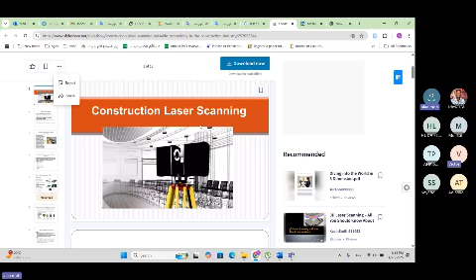In this research, we will define what construction laser scanning is and its applications in civil engineering and other fields, the types of laser scanning, the equipment and software used to generate models, the workflow for fieldwork and laser scanning, the challenges and limitations of construction laser scanning, and future developments in construction laser scanning.

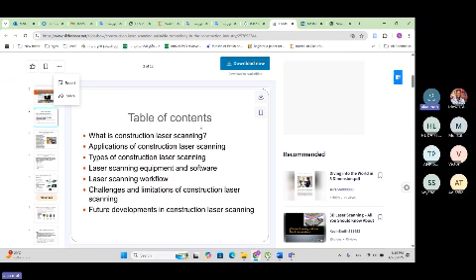What is construction laser scanning? We can name it as LiDAR. It's a modern technology used to create a 3D model from a physical object or environment.

In the field of construction, we use laser scanning to capture the exact dimensions, shapes, and position of buildings, street infrastructure, etc., with high accuracy and speed. In construction engineering, we name this 3D model as an as-built model. We can capture exact details of any structure or infrastructure or street, etc.

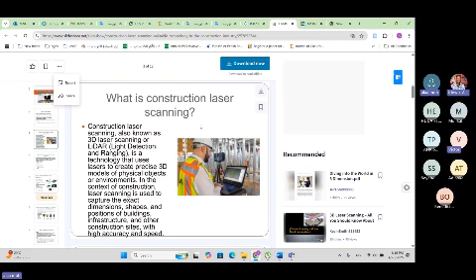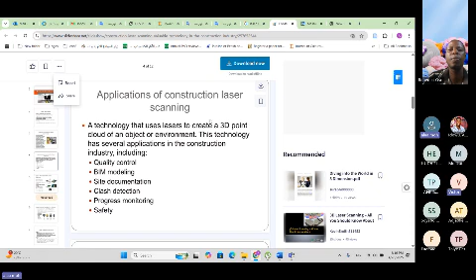Application of construction laser scanning in civil engineering: this technology is used to generate a 3D point cloud, which is millions of points for the object or environment. We have several applications in the construction industry: generating as-built models, quality control, BIM modeling, site documentation, clash detection, progress monitoring, safety and stability analysis, etc.

What are the types of construction laser scanning? We have 4 to 5 types of construction laser scanning: TLS, MLS (mobile laser scanning), aerial laser scanning, handheld laser scanning, and underground laser scanning.

Also, for aerial laser scanning, you can use a drone for this type of scan. We can put the laser scanner on the drone, scanning the details, let's say, above the building or any type of structure.

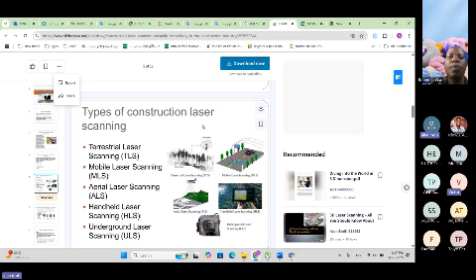We have many types of laser scanning equipment and software and many models. When we choose the best laser scanning for our task, we must read the features of this laser scanning and what we do in the task of laser scanning. The tools are used to create detailed 3D models of physical objects or environments, which can be used for design, analysis, documentation, and visualization processes.

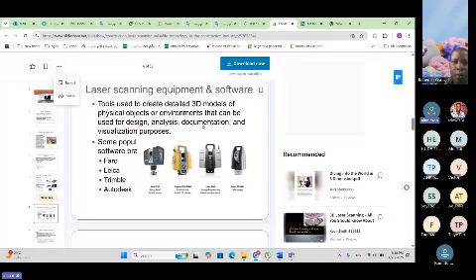We have many software companies, let's say Leica, Trimble, Autodesk, Faro, and others. All these companies generate or design many types of lasers, and we can choose the best one for our task.

Laser scanning workflow: when we work in laser scanning, we have many steps in the workflow to generate the 3D model. Step one is planning. This involves defining the scope of the project, why we will use laser scanning for this project, the necessary accuracy of the laser scanning equipment, and detection of scanning location. We must define the laser scanning location before starting the project.

Step 2 is scanning. This involves setting up the equipment and scanning the target area. The scanner emits a laser beam that bounces off the surface of the object or environment to create a point cloud, which is a collection of 3D coordinates XYZ.

Step 3 is registration. This is the combination of scans into a single model, unifying the model either manually or by using software. We can generate or register the point cloud on site or in the fieldwork. Also, we can collaborate with software processing. These steps include cleaning up the point cloud, removing any noise points, and creating a surface mesh.

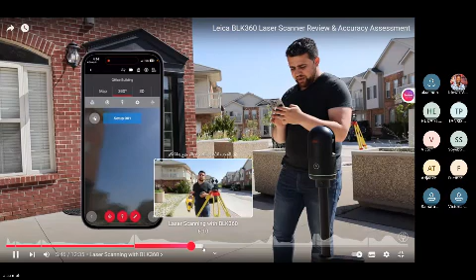This is the image and modeling.

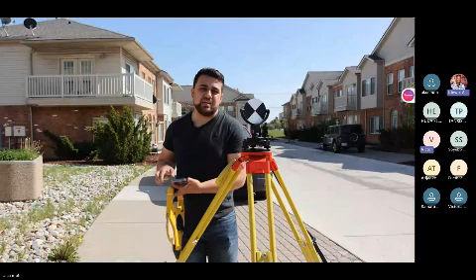I think someone wants to ask a question. Mr. Sheyi, please, can you ask your question?

Yes, okay, thank you ma. From the video, I think it's clear now. Hello, yeah I hear you. Okay, from the video so far.

We can see in the phone, can use the software to work on it. It's very easy. Also, we can see what scan we want, or if we want to delete the scan, we can delete it and re-scan. It's very easy.

But you must be an expert to use this tool, because it's very sensitive. In 1 minute, we can generate a 3D model. We must be accurate to put the point of work, and know where to put the scanner to scan the model or infrastructure, etc.